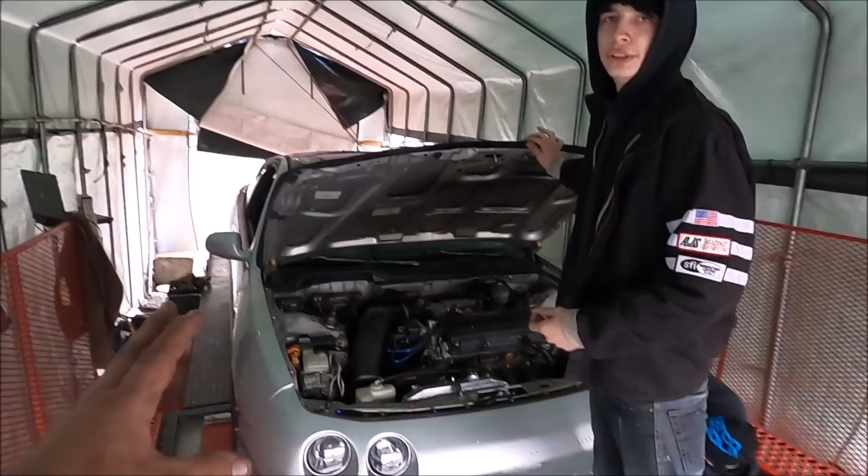Right, guys, we are here with Zach's Integra. Should I lift this all the way up because of how windy it is? Just lift up the regular one there.

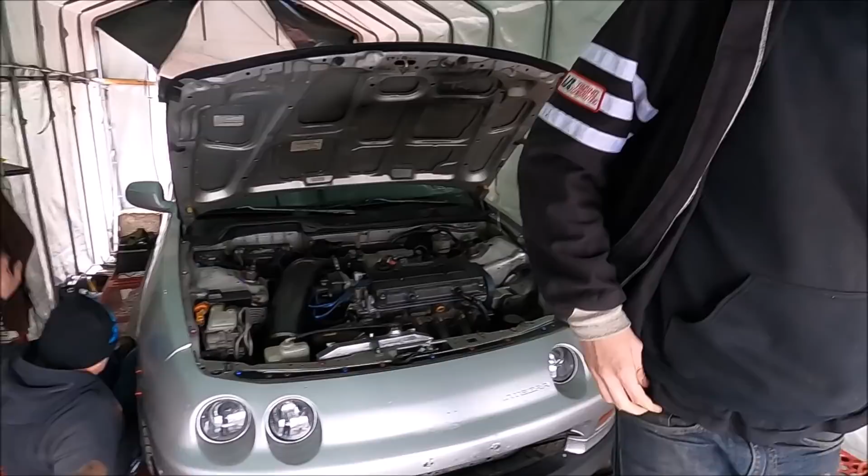Like I was saying, we're here with Zach's Integra. The car is finally finished, and let me tell you, there is one hell of a story behind it. We will tell you about that later in this video, so please stick around till the end to hear all the trials and tribulations Zach and I have had. And there was a lot, there was a lot with this freaking engine.

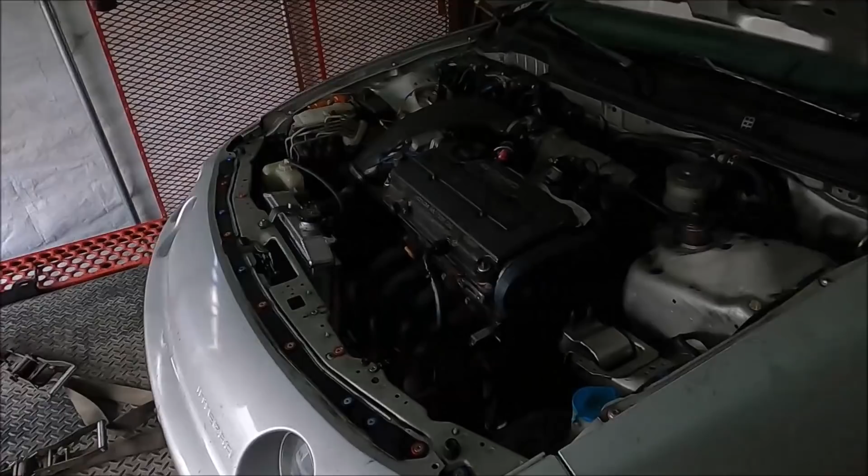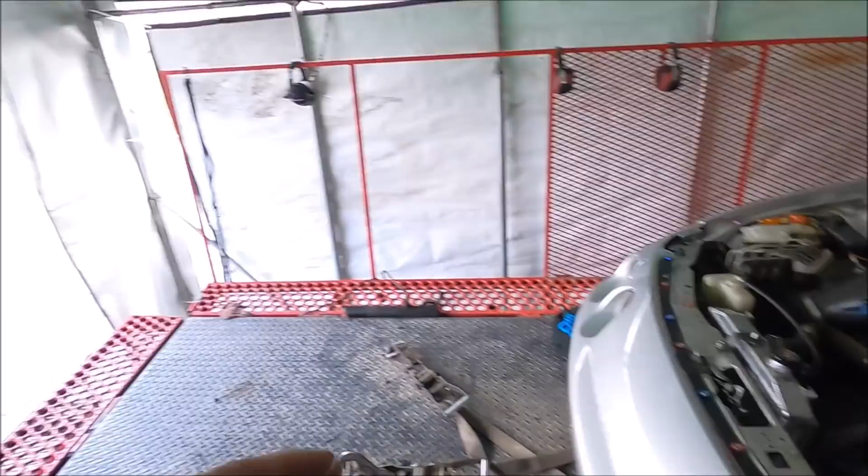If you want to get out of cars... Basic build breakdown is a CRV 2.0 liter short block with a GSR P72 head with brand new valves in it, and all that good stuff. Skunk 2 intake, basic bolt-ons, long tube headers, all that stuff. So basically, this is called a Frankenstein build, a Frankenstein B20 VTEC or whatever.

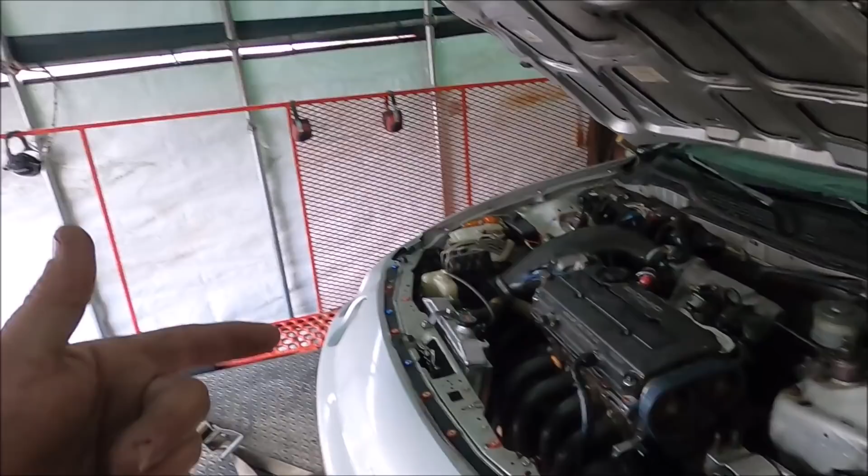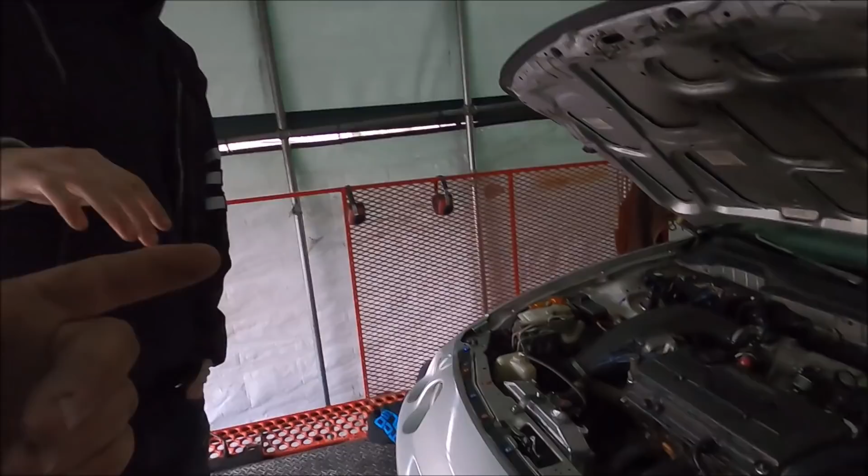So we decided it'd be a good day to get this thing back on the dyno real quick, do a couple pulls, 1 or 2, 3 pulls, check air fuel, and make sure it doesn't blow up. And if it does, you'll be seeing that at the end of the video as well, I guess.

Keith, I want you to take it to rev limiter. Oh jeez, 8,300 RPM, don't tell Keith that, he'll be like 'I'll full send this son of a bitch, I don't care, it'll go to 80.' He's like, the day we've been having. Yeah, and we've been having one hell of a dyno day today, guys, let me tell you, it's been interesting.

What about the fans? I don't think we're going to need fans, you think? Probably not, nah, yeah, I doubt it. It's like 35 degrees, we ain't going to need no fans. I don't think it's gonna get hot, it's not even worth it.

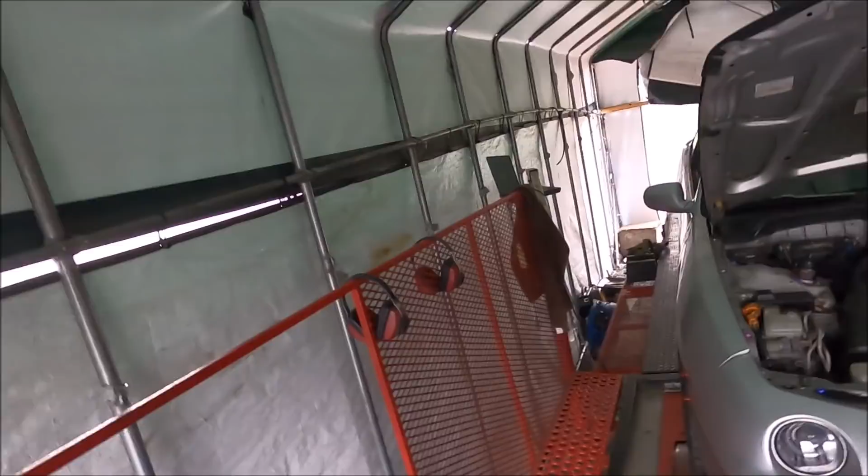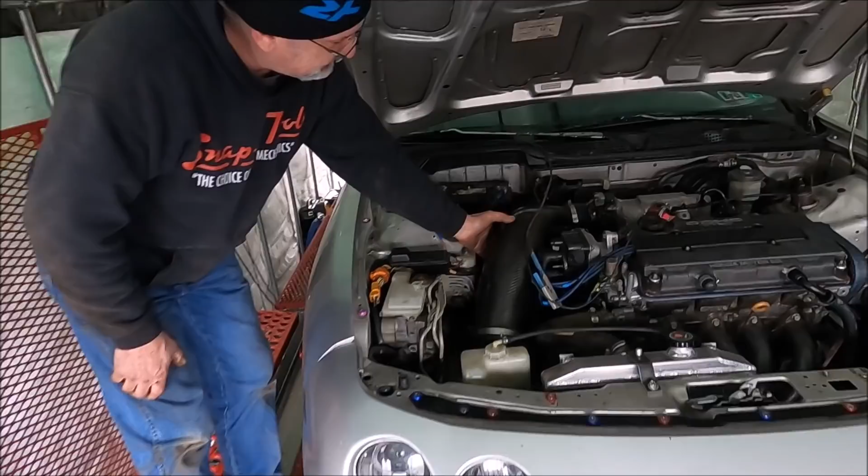Oh, you got the blocks in the back? Hey, when we dynoed it the last time, did we have that other intake on? Yeah, we didn't have the wheel... is that loose? No, it's fine, it's a little loose, no that's just the rubber. Dude, we literally got the car - yeah, rubber's a little loose, but this was on the dyno like 2 weeks after getting the car. It had the short header on it and everything.

Gosh, I hope you guys are excited to see what this thing puts down. What's your guesses, Zach, realistically? Well, I've heard mixed opinions. I've heard some people say they make like 200 horse at the wheel, about 190-200, but other people are saying they make like 150, 140. It's like the internet is a perfect 50-50.

And people say - I guess we're going to teach the internet the truth today. Some people say they make more power, other people say they make less power than the 1.8 liters. Everybody agrees though they make more torque. We're gonna teach the internet the truth today. I know Keith's excited to drive this beast of a machine - I mean, it's literally the same exact setup, just 1.8 liter to 2.0. The only difference is 1.8 liter to 2.0.

Kaboom. Here we go, guys, first pull, see if she goes kablammo. If she does, we have a tow rollback on the way.

Let it warm up a little bit. Oh yeah, it's smoking, it's fucking cold. Blowing out the carbon. I guess fourth, it's a... unless it's third, whatever 1-to-1 is, I'm assuming third or fourth.

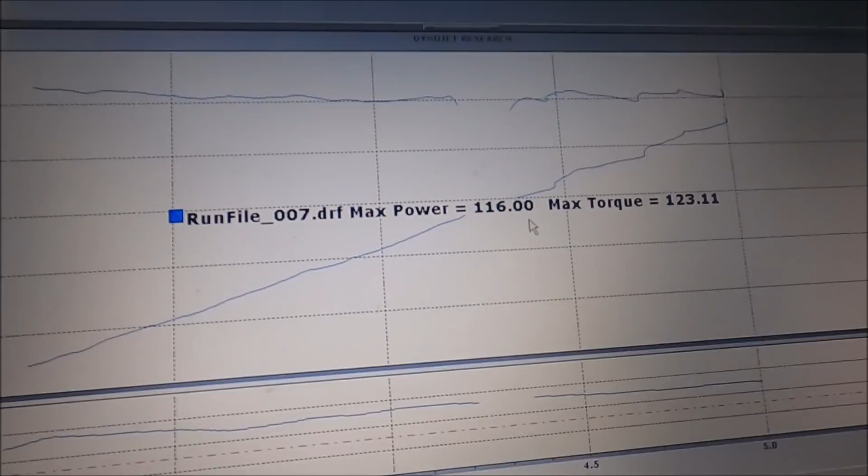All right, round number 2, fuel pressure is up.

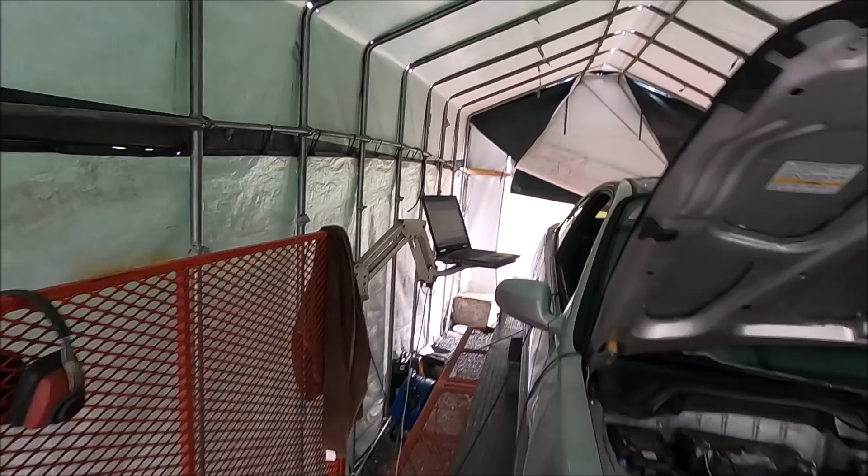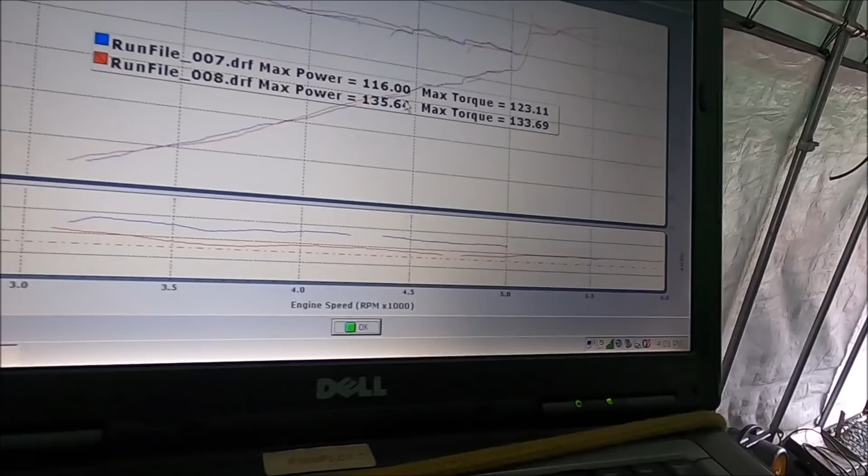Let's see what she did. Still lean? Yeah, it's definitely richening up. Not enough, but it's richening up. You're not even near yet. Yeah, it got boring. That's 14, tell me what you want me to do.

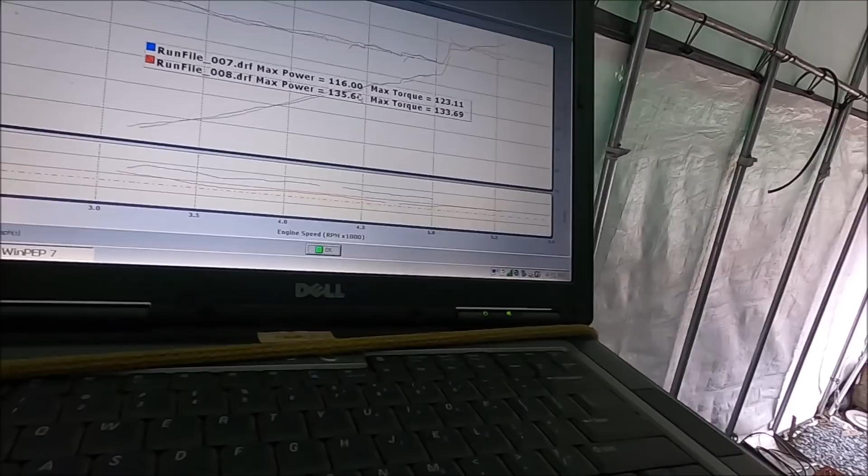Does it look like it levels out at 14? Yeah, could dive a tad bit more. I don't know how much more I can add. All right, air fuel's like 14, so we're gonna full send it all the way to 8 grand.

Yeah, smoking. What's up? It shut down at 5,500. Oh, did it? Gotta get the torque. The torque's not reading. Isn't it? I mean, air fuel is still looking where it needs to be.

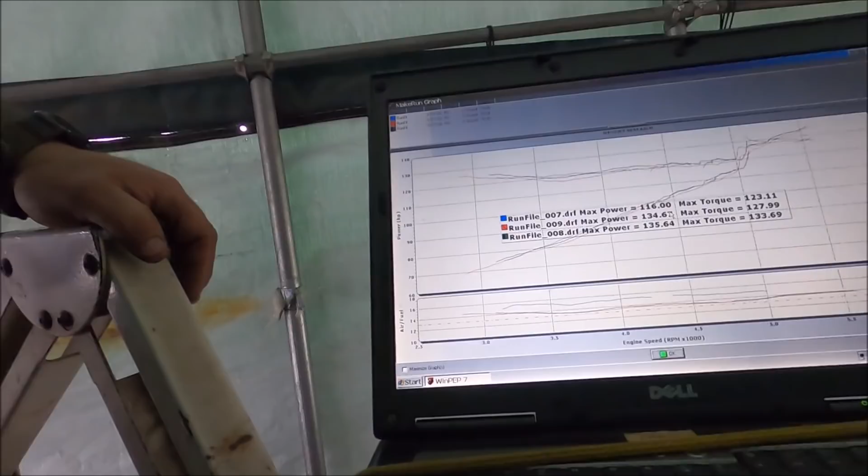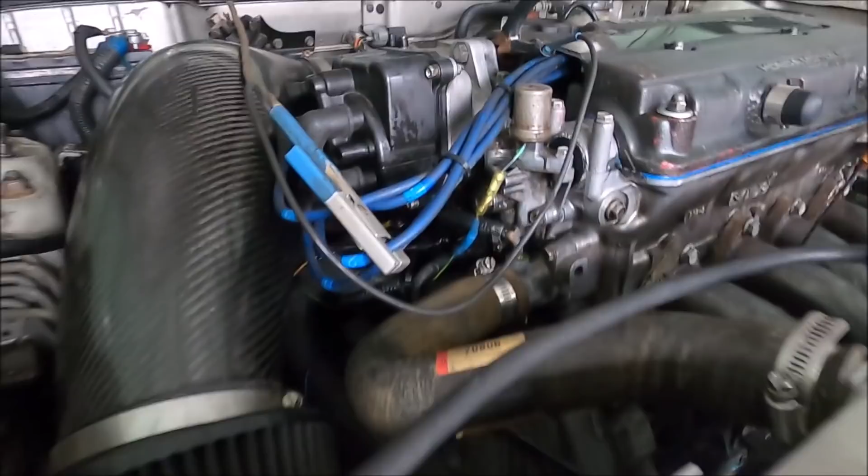Yeah, let me try something. Didn't tighten it up when they built the car. You did that line. I did not do that line. We just have a little bit of a coolant leak here we gotta address.

What do you need? No, just a flathead screwdriver. Go get a flathead screwdriver real quick, Zach.

All right, we repositioned the tach signal wire to get a better reading of everything, and we fixed the coolant leak, so that's fixed too. Hopefully we make some power and we can take it up to 8 grand, but we only went up to 5,500. You excited? Oh God, here we go.

Doggy. Well, she didn't blow up yet. Get ready for that time.

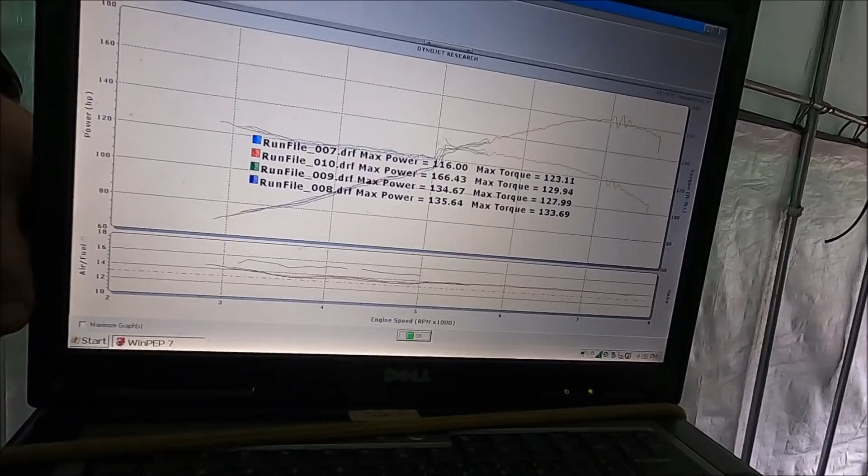166, 166, 166, 128, or 129. I think that's about as good as it's going to get right now. It needs more fuel, it needs more fuel, and we definitely didn't even adjust the spark or anything, but it definitely is running lean. Now what?

166, we're done. Really? Yep, that was it. Not gonna do nothing else? No. Oh man, how much did it make? 166, 129. Did you say turn the VTEC up? How's that possible? We haven't.

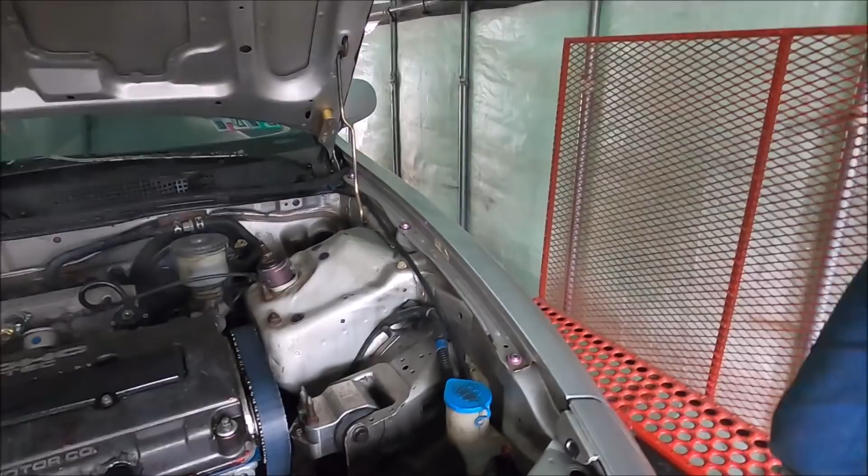Can't be good. Oh, something's dripping down there. On the block? Oh no, you know what it is? It's this right here. Well, I see you got a lot of blow by here. Yeah, there's a lot of blow-by. That's why we put the catch can on.

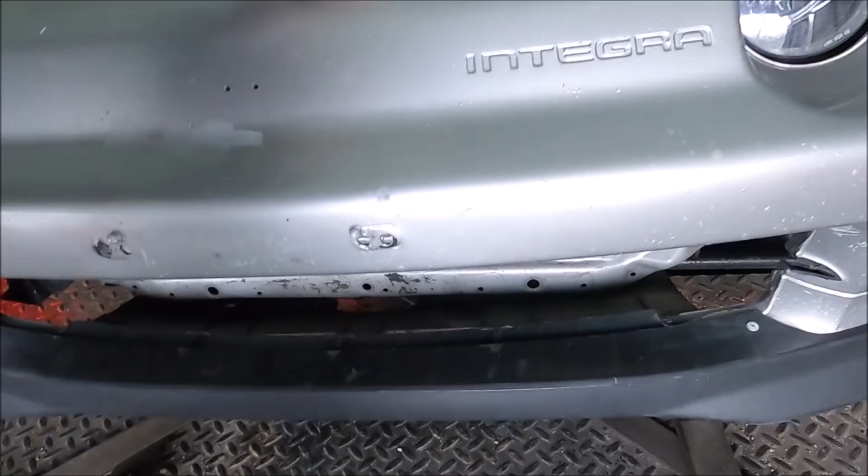Yeah, I think it's just the dipstick tube. We're definitely not making the horsepower we should be. Oh, something's leaking under here. Is it oil? Oh, it's antifreeze.

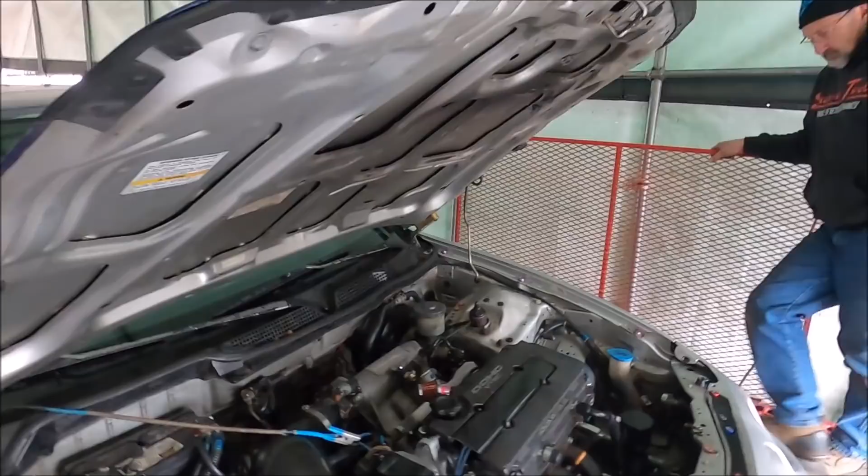So we definitely have a lot of things to address on this vehicle. But at least we know it goes to 8 grand, right? Yep. You go to 8 grand? How far did you go up on this sucker? About 7,500 RPM.

It started breaking up. So she definitely needs tuning, which we unfortunately just don't have the capabilities of doing, you know what I mean? We don't have any way of tuning it. It does have a chipped PCM or ECU, but it's not worth anything, to be honest. We'd rather have Hondata or something of that nature.

Y'all want to sponsor us over there at Hondata? Yeah, I highly doubt Hondata is going to sponsor this hunk of junk, to be honest. But not bad, 166 with shit pissing all over the place.

Yeah, you probably need some antifreeze hoses, that's probably what's going on. Some of the hoses back there are probably loose, and when you're going wide open throttle, it's building up that pressure, you know what I mean? And it's spraying it everywhere. That's all it is, dude. So we gotta fix that. Now we know at least.

Yeah, that sucks. It didn't even explode. And it didn't explode, that's fine. It didn't explode. Need this picture. That's freaking awesome, it didn't even explode, man.

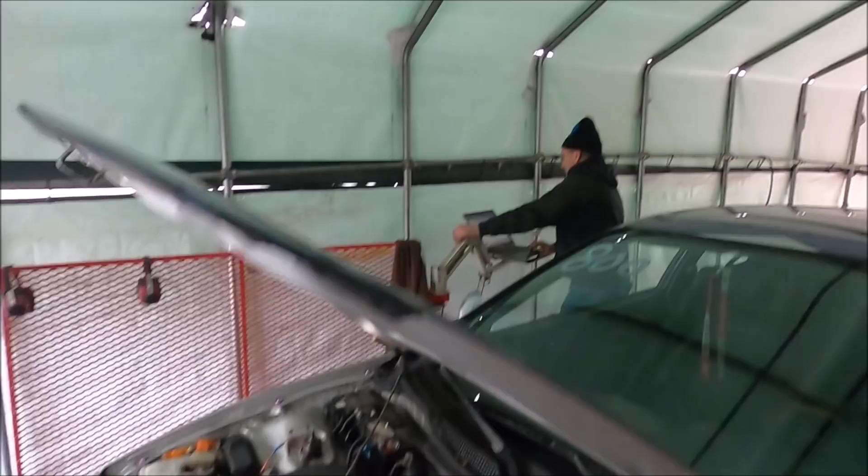Try harder, do it in first. One more PSI, one more PSI. No man, just one more degree. It can take it, I know my car. So at least we know it can do it.

The 2.0 liter looks like it's doing good, other than a little dripping here and there, it can definitely do more. But we'll definitely be having this thing back on the dyno for sure. It can definitely do more.

Zach and I are going to tell you about all the fun stuff that we got involved with in this build, all the trials and tribulations, guys.